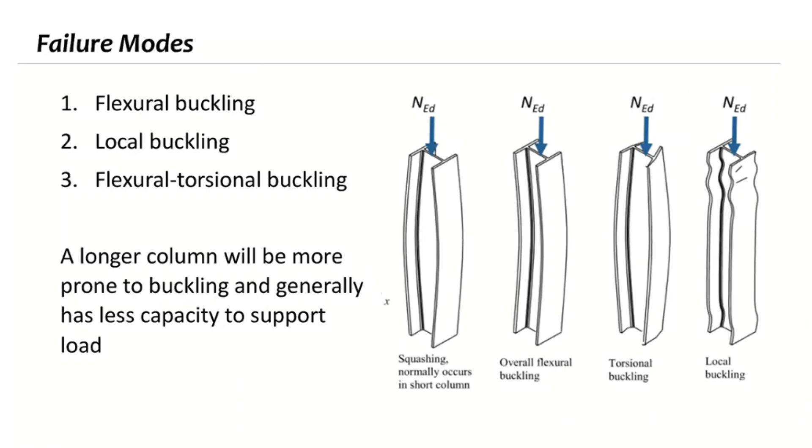Last meeting we discussed all about the principles of compression members. We discussed that there are several failure modes that we are expecting in our compression member, and the most common failure in our compression member is actually flexural buckling. So, in order to determine the flexural buckling, we have to determine our slenderness ratio.

Slenderness ratio is actually a measure of the tendency to buckle of a certain compression element. The higher the slenderness ratio, the lower will be the capacity. Again, the higher the slenderness ratio, the lower will be the capacity. That is buckling.

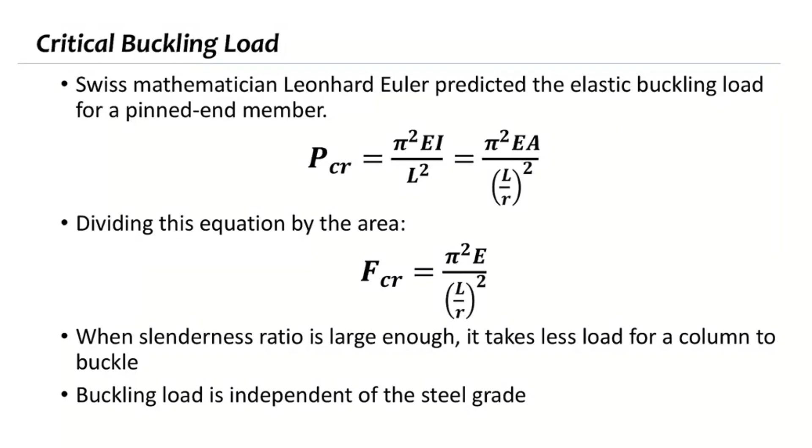We discussed the equation of Euler, where he developed an equation regarding critical buckling load on a pin end member. We discussed that there are two types of buckling. We have inelastic and elastic. We have inelastic and elastic buckling. And we already discussed the difference between them.

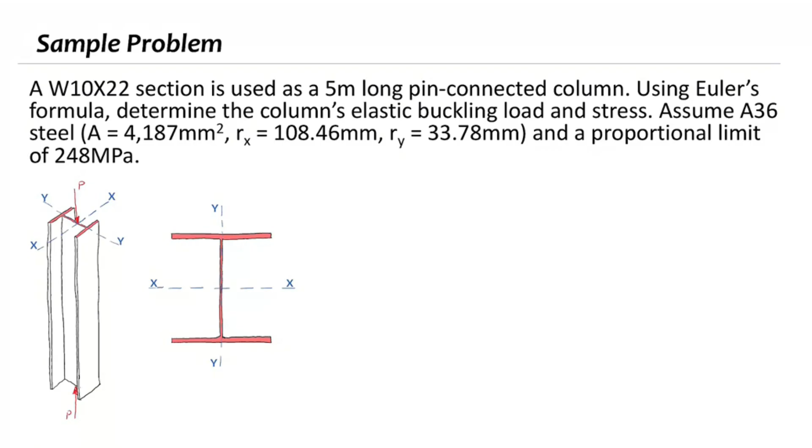We said that for elastic buckling, what happens is that the column buckles even before it yields. The column buckles before it yields, and for the other one, the column yields before it buckles. That's inelastic. When it yields before it buckles, that's inelastic buckling.

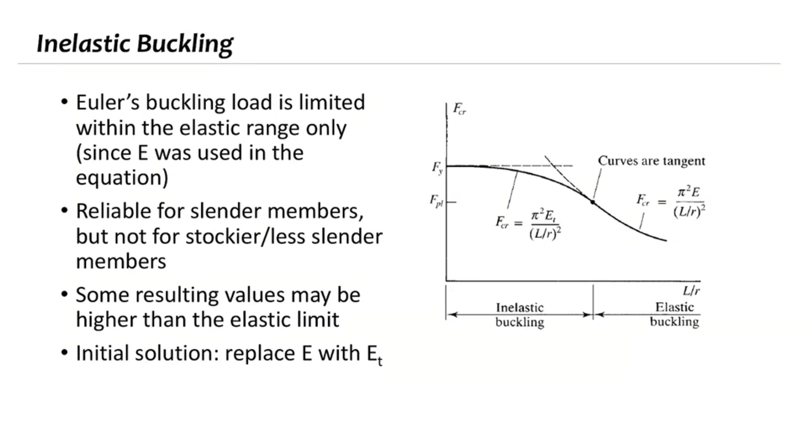Moving on, knowing that there are two classifications of buckling, we have inelastic and elastic buckling. The code actually considers these two types of buckling. In order for us to determine which one is elastic and which is inelastic, we have a boundary. This is the boundary slenderness ratio, or the limiting slenderness, which is 4.71 square root of E over Fy. So, if the slenderness ratio is greater than 4.71 square root of E over Fy, that will be elastic buckling, and our formula for the flexural buckling stress will be 0.877.

On the other hand, if the slenderness ratio is less than 4.71 square root of E over Fy, then the FCR will be 0.658 Fy over Fe, which is basically inelastic buckling. So this is inelastic buckling, and the other one will be what we call elastic buckling.

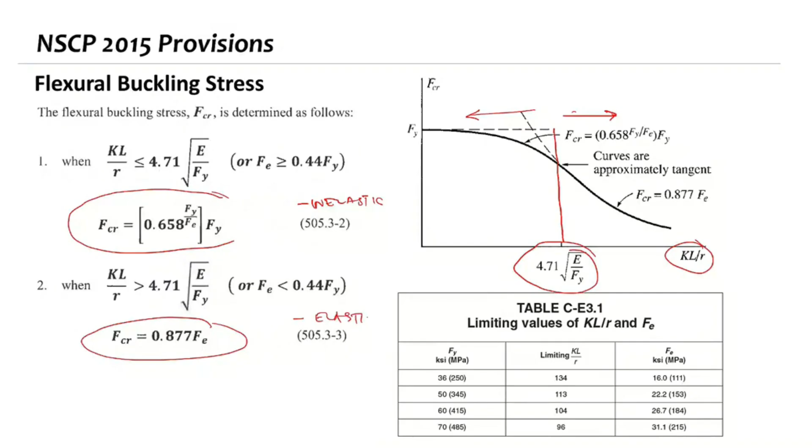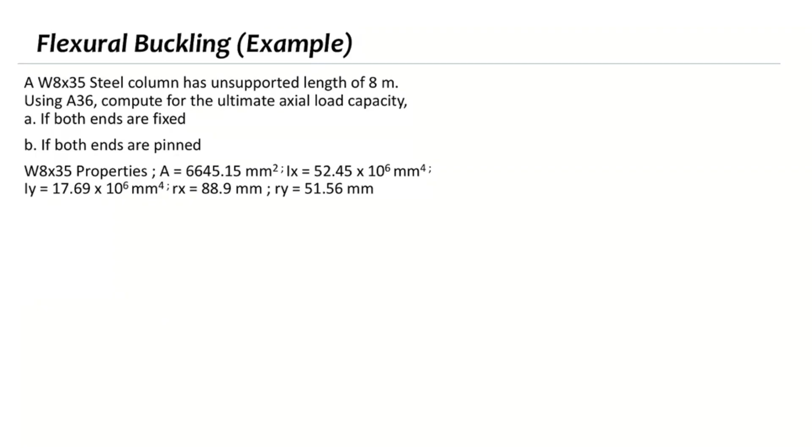We also answered two problems, I think, or three problems, because for this one we answered it twice. If both ends are fixed, both ends are pin, and then we answered another problem where we had to calculate for the radius of gyration, as well as calculate for the DC ratio and the critical slenderness.

Okay, so moving ahead, continuing with our sample problems. Let's try to answer this problem given the concept that we had on flexural buckling.

For this problem, we have to determine the maximum length of W14 by 82 if it's used as a hinge column to support a service dead load of 450 and a service live load of 900 kilonewton, given that Fy is actually 450 megapascal.

According to the problem, we have to use ASD. So given the properties of the W14 by 82, what will be the maximum length of our section? Given that we already have a load, we can use that load to calculate the applied load in our column. So we have the dead load plus the live load. Our load will be equal to 450 plus 900. This is equal to 1,350 kilonewton. And then we can now determine the slenderness ratio.

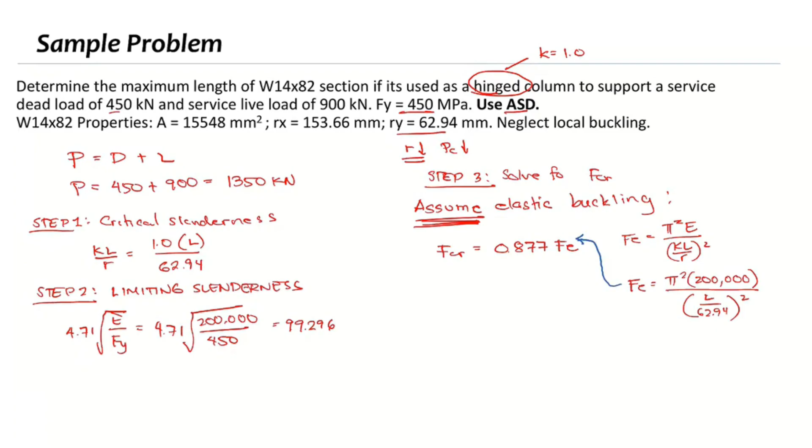Now, since FE is a function of length, we have to input FE to FCR. FCR will be equal to 0.877 times FE, multiplied by pi squared times 200,000, divided by L over 62.94 squared. So this is our FCR.

Now, given that we have FCR, we can actually equate. Step number 4, we are going to determine PN. So step number 4, solve for PN. We already know that PN is just equal to FCR times area gross.

And since we are using allowable stress design, ASD, P allowable is equal to Pn over omega, which omega is actually equal to 5/3. So Pn over 5/3.

Now, the P allowable, we are now going to equate this with our value of the axial load, the axial load that the column is actually carrying. So if we are going to equate it with 1,350, then the equation now will be 1,350 is equal to Pn.

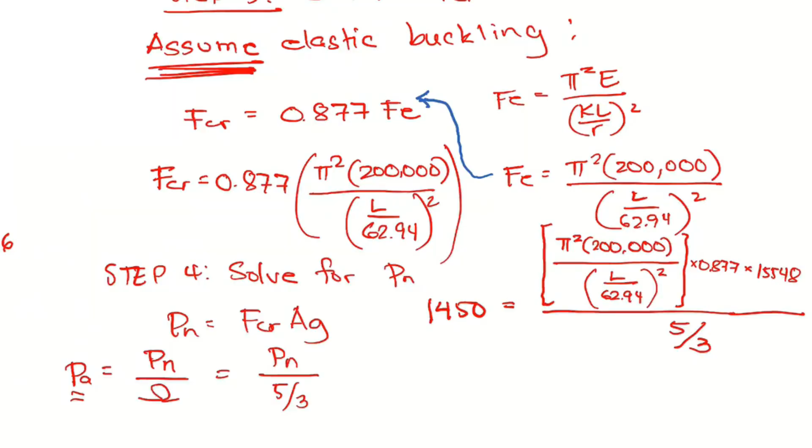Pn is equal to FCR, which we already have, pi squared times 200,000 divided by L over 62.94 squared, times 0.877, times area. The area of our section is 15,548, divided by 5 thirds. And since the answer will be in Newton, I have to convert the 1,350 to Newton, times 10 raised to 3.

Given this equation, I can now solve for the length. What is the length? For this one, pi squared times 200,000 divided by x over 62.94 squared, times 0.877, times 15,548, divided by 5 thirds.

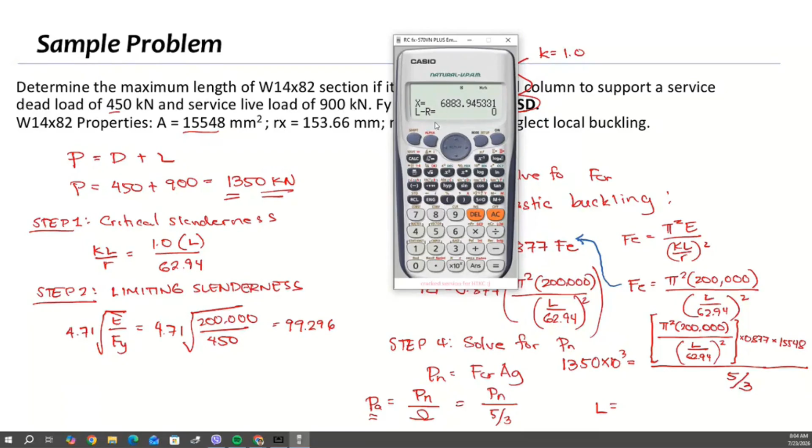Okay, shift solve. We will have a big number, so around 6,883.945. So the answer is actually around 6,883.945 millimeter. So again, that's not yet the final answer because we are still assuming.

We are assuming elastic buckling, so we have to check whether it's correct or not. We have to check if it's elastic buckling.

So to check whether it is actually elastic buckling, then we have to calculate KL over R, which will be 6,883.945 divided by 62.94. What's the slenderness? That is equal to 109.373. 109.373 is greater than 99.296.

So that means this is indeed elastic buckling. So our assumption is actually correct. So the final answer will now be this value, 6,883.945.

Is there any question regarding this problem? As you can see, we just follow the same procedures that we have. Is this clear?

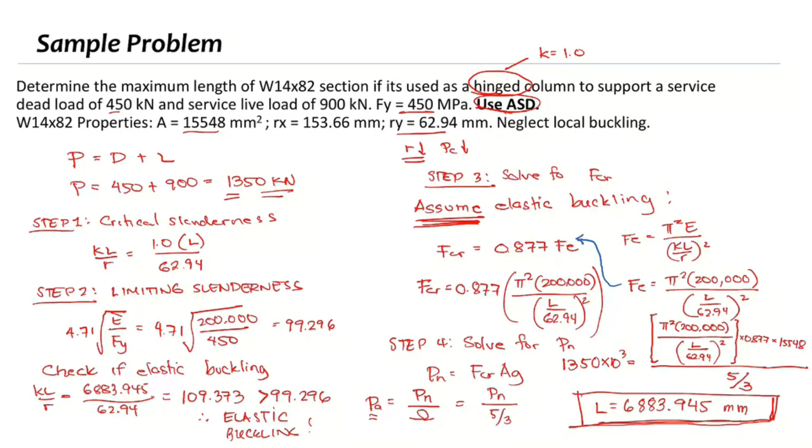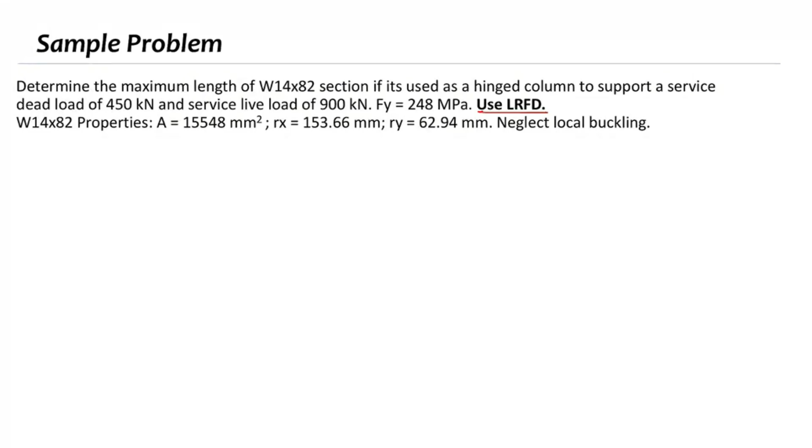So it's actually the same problem, but now let's try to recalculate it. But this time, the Fy will be 248, and at the same time, we are going to use LRFD. So it's almost the same problem. We have to determine the maximum length if it's used as a hinge column to support a service dead load of 450 and a service live load of 900. So for this one, our ultimate load will be factored.

So that is 1.2 dead plus 1.6 live. So our PU will be equal to 1.2 of dead load 450 plus 1.6 of live load 900, which will give us an ultimate load of 1,980 kilonewton. So step number one, we actually calculate for the critical slenderness, that is KL over R.

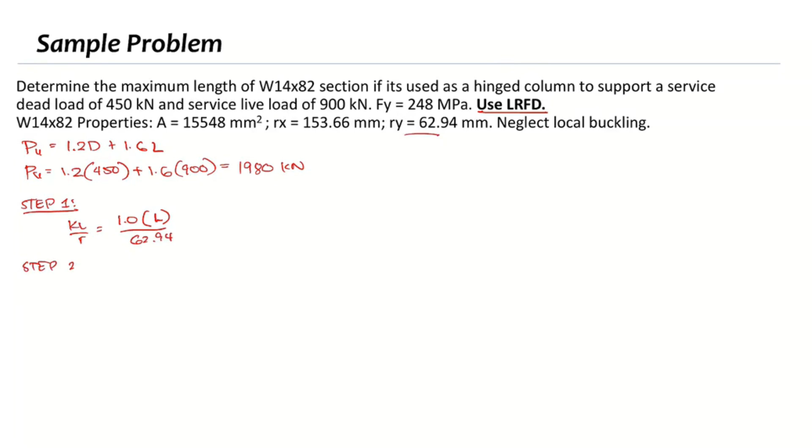Since this is a hinge condition, that's 1.0 times the length. The length is actually unknown, L over R, which is 62.94. And then step number two, we determine the limiting slenderness. And we already have the limiting slenderness, that's 4.71 square root of E over Fy.

But it will change now, the limiting slenderness, since the Fy was changed. So this is 200,000 over 248. Our limiting slenderness is what?

133.755. And then step number three, Step 3, we calculate FCR, solving for FCR. But this time, since we don't know the slenderness ratio yet, I'm going to assume elastic buckling.

Assuming elastic buckling gives an easier calculation. If you think about it, if you use inelastic buckling, what happens is you have a variable in the exponent, because the formula is 0.658 Fy over Fe. So you'll have a variable in the exponent. Still okay, however, it's much easier just to calculate for elastic buckling.

So assuming elastic buckling, FCR will be equal to 0.877 times Fe. Solving for Fe, that is pi squared E, 200,000, divided by KL over R squared, so that is L over 62.94 squared. And then calculating for PU.

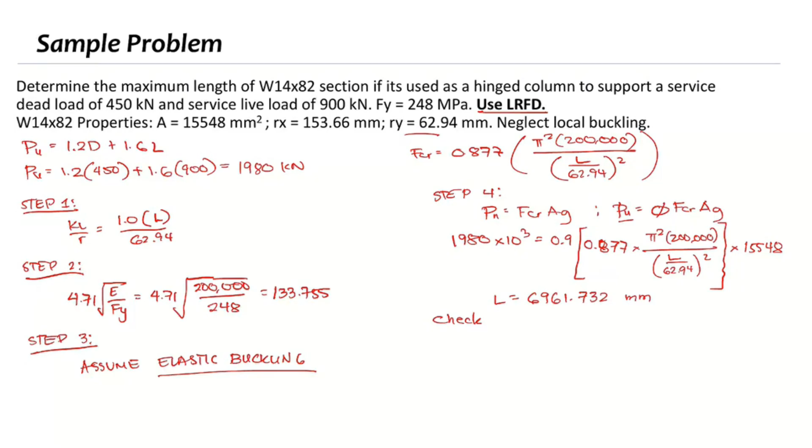Check slenderness. Let's check the slenderness, if the length is actually really elastic buckling. So calculating for KL over R, that will be equal to 6961.732 divided by the radius of gyration, 62.94. This will give us 110.609.

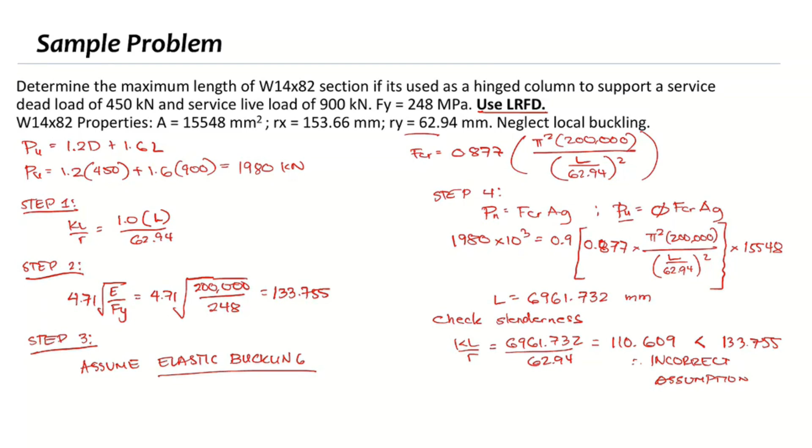110.609 is actually less than 133.755, so this is an incorrect assumption. If that is an incorrect assumption, then we have to recalculate using inelastic buckling. This time, this is not an assumption anymore, it's already given that the column will undergo inelastic buckling. So use inelastic buckling.

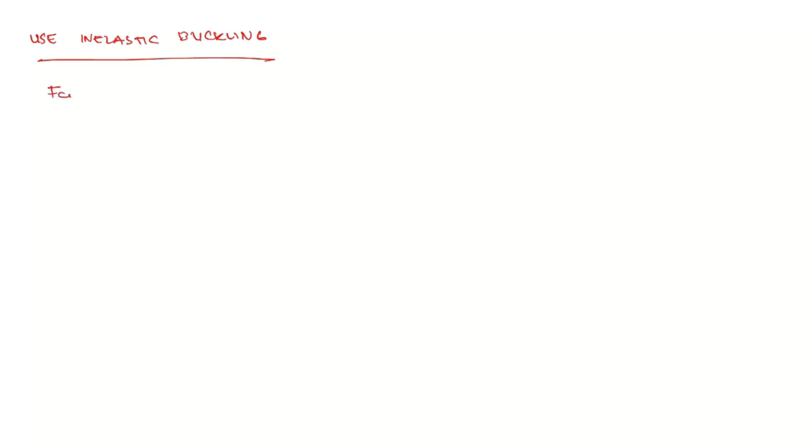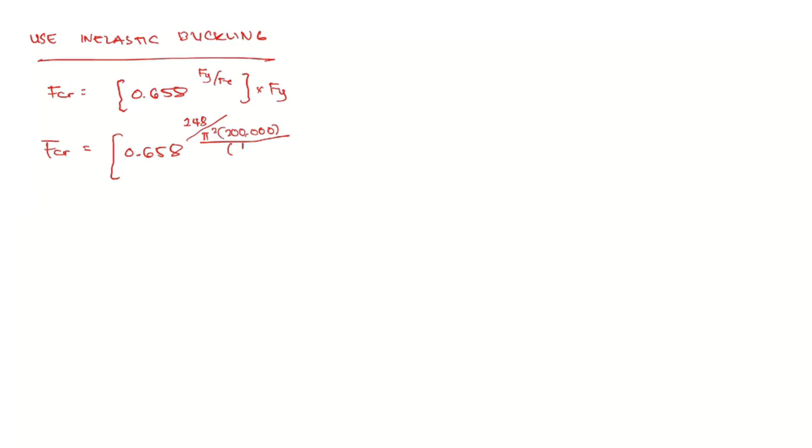So considering inelastic buckling, our FCR is equal to 0.658 raised to Fy over Fe, times Fy. Substituting, our FCR is equal to 0.658, Fy is 248, divided by Fe, that is pi squared E, 200,000 divided by L over R. Our R is 62.94, so that is L over 62.94 squared, quantity, times Fy, that is 248. So that is our FCR.

It's a factor of the length. So if you want, you could simplify it given the following values. Let's just say if we simplify 248 divided by pi squared, that is pi squared times 200,000, divided by 1 over 62.94 squared. So just like this.

So that you could have the value, please store this to A. It will be stored on A. And then if it's stored in A, then just divide. So this value divided by the L squared that we have, that will become our exponent.

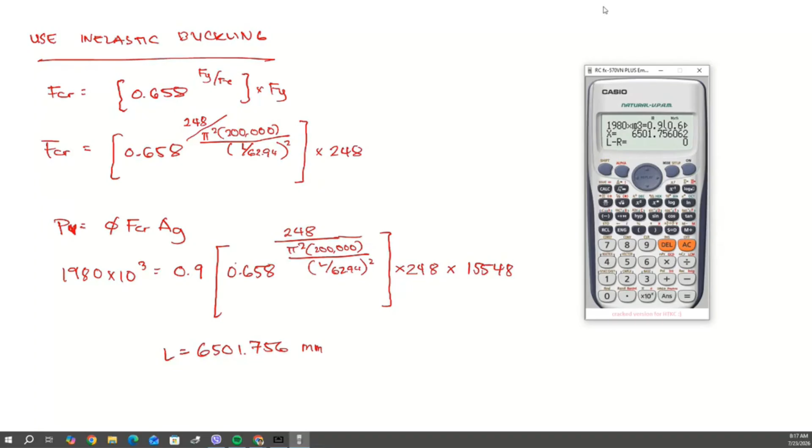Now that we have the length, let's also try to check if indeed the KL over R is actually less than. So let's check KL over R. Our K is 1.0, the length is 6501.756, divided by the radius of gyration, which is 62.94. What is our value?

103.3, this is actually less than 133.755. So this is correct, inelastic buckling. So this is indeed inelastic buckling.

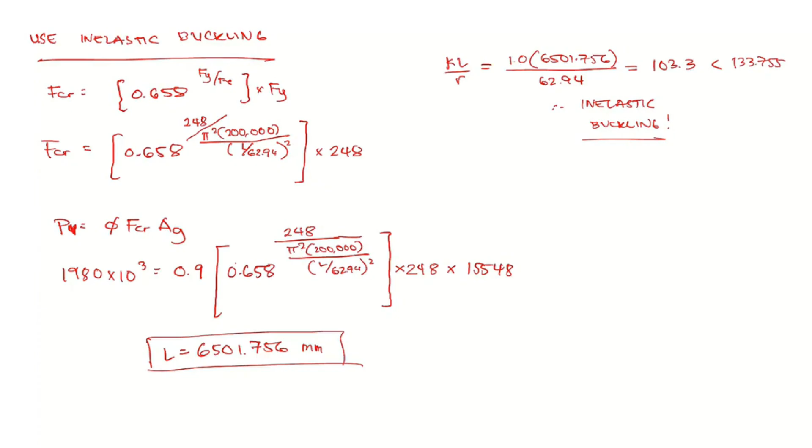Okay, so let's try to answer more problems again. For this one, this is actually a sample quiz, a quiz from last semester. So this is the one that I gave.

A billboard 2 meter high and 4 meter wide is supported on each end by a pin-jointed assembly. The total weight of the billboard is 32 kilonewton. Given that h is 1 meter, this is 1 meter, this is also 1 meter.

The theta is actually 60 degrees. This is 60 degrees. The wind pressure acting on the billboard is 2.0 kilopascal. Wind pressure coefficient is 1.2. So the wind pressure P is equal to 2.0 kilopascal and the wind pressure coefficient C is equal to 1.2. Use A36 steel and neglect local buckling.

Hint: wind load is pressure times the coefficient times the area of contact. To calculate the wind load, please imagine the billboard that we are solving. There's basically a billboard, and if I draw it in 3 dimensions, there's a billboard and two assemblies at the ends. Can you imagine that there's actually two assemblies on both ends? There's a pin-jointed assembly on both ends.

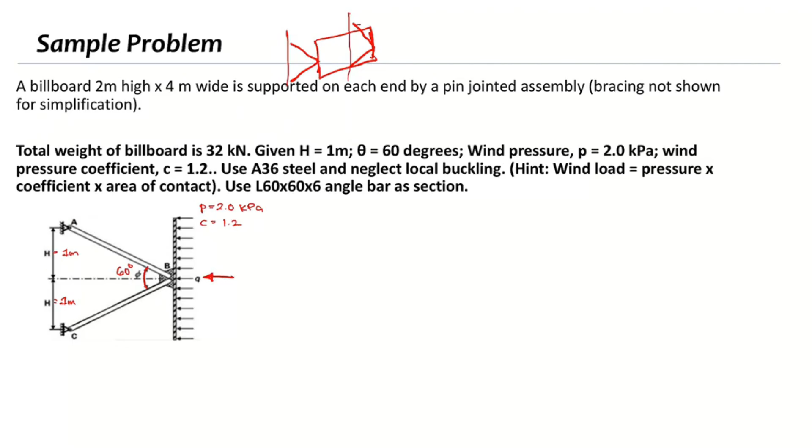So for us to determine the total wind load, which is acting at the center of the billboard, the wind load is equal to the pressure times the coefficient times the area of contact. The coefficient is 1.2, the pressure is 2.0, and the area of contact is the area of the billboard, which is 2 meter by 4 meter wide. So that will be 2 by 4, which gives us the total wind load equal to 19.2 kilonewton. So the total wind acting at the center of the billboard is 19.2 kilonewton.

We also have the weight of the billboard. The weight of the billboard is actually 32 kilonewton.

If we are going to consider only one assembly, let's say only the left side or the right side, then of course the member will not carry all the loads. They will be divided into the two assemblies.

So the 32 kilonewton, I have to divide that by 2. So what one assembly carries is 32 over 2, that will be 16 kilonewton. On the other hand, the wind load: the wind load is equal to 19.2, so divided by 2, that will be equal to 9.6 kilonewton. And then, applying the joint method, I can now calculate the load in our members.

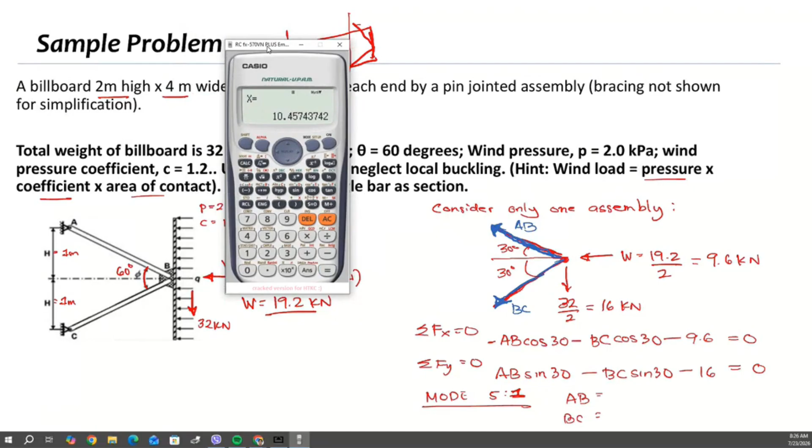So in that case, given the x value that we have, our AB is 10.457 kilonewton. It means positive, so it will be tension.

The BC, on the other hand, is actually 21.543 kilonewton. Since it's negative, it will be compression. So 21.543 negative, that is compression.

Since we are designing the compression member, we are going to determine the DC ratio. I think I forgot to put it here. Determine the DC ratio of member BC.

We have to determine the DC ratio of member BC. So what we are designing is member BC, which is actually in compression. Use ASD, allowable stress design.

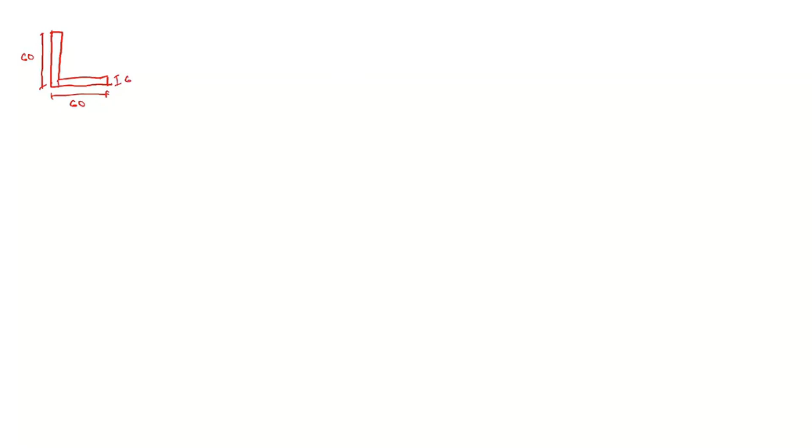So that is 60, this is 60, this is 60, and this is 6. Solving for the area, this is 60 minus 6, so that is 54.

The area will be equal to 60 times 6 plus 54 times 6. What's the area? 684 millimeters squared.

Calculating for the centroid, let's calculate for y bar first.

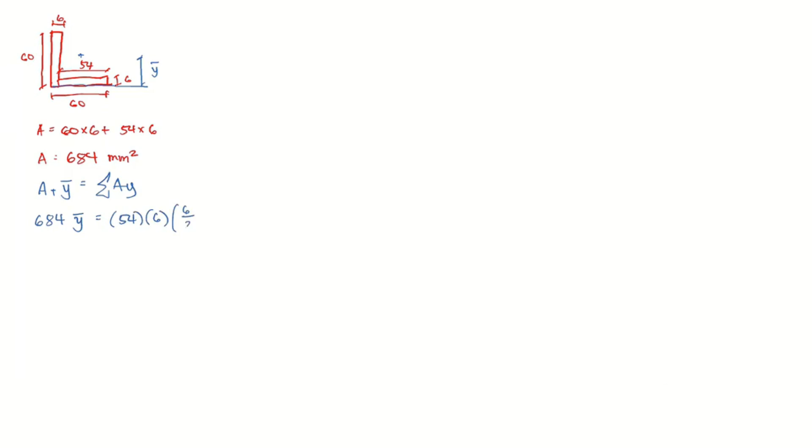Area total times y bar is equal to the summation of area times y. So 684 times y bar equals area 1, 54 times 6, times 6 over 2, plus 60 times 6 times 60 over 2. So what is our y bar?

17.21 millimeters. Given that the section is equal angle, this y bar is also equal to x bar. Since it's equal angle, our x bar and y bar are actually equal, because no matter the orientation, the position of the centroid remains the same.

So if you want to verify, let's check if they're really equal. Let's try to calculate the centroid coming from the left support, or from this reference line. To check, calculating the centroid, that will be 684 times x bar equals 60 times 6 times 6 over 2 plus 54 times 6 times 6 plus 54 over 2. What is our x bar?

I think it will be the same. Is that right? 17.21. It's basically the same. So because they are equal angle, y bar is equal to x bar.

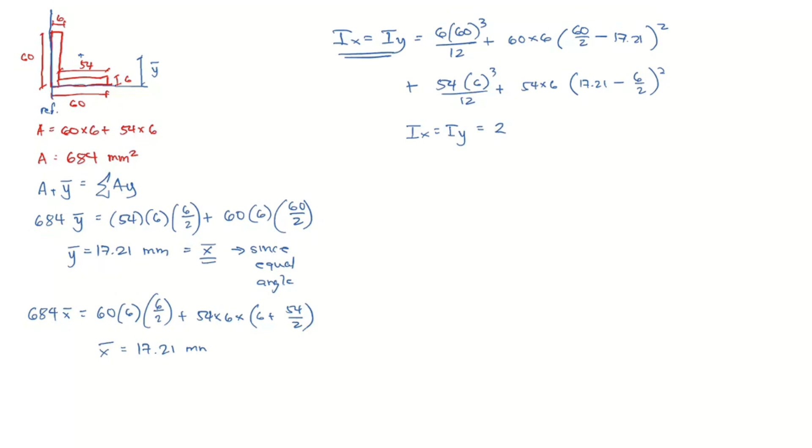The answer is 233.286 times 10 raised to 3. Is this correct? Can anyone else confirm the value of Ix?

Raised to 3, okay, raised to 3. So, times 10 raised to 3. 233.286 times 10 raised to 3. Is this okay?

Can anyone else confirm? Okay, so if this is okay, do you agree that I can now calculate for Rx, or the radius of gyration that I will be using, to calculate for the radius of gyration?

Let me put some context into that question. We already agree that when we are solving for KL over R, the radius of gyration that we should be using is actually the R minimum. It's already established that when we are solving for KL over R, the radius of gyration we should use is R minimum.

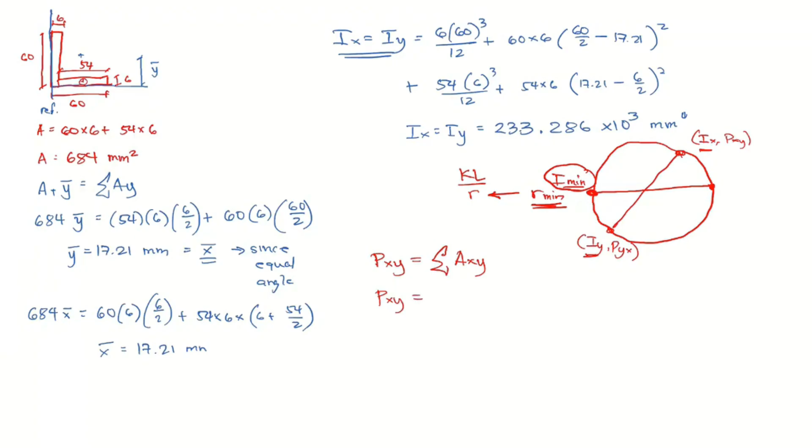So solving for the product moment of inertia, Pxy, that is equal to the summation of area times x times y. If you can still remember, Pxy will now be equal to area 1, let's consider the bottom part or the left part, that's area 1, and the bottom part is area 2. So the left part, 60 times 6, area is 60 times 6, and then the x value will be equal to 17.21 minus 6 over 2.

Is it positive or negative? It will be negative since it's actually on the left side. So that's x, and then calculating for y, the y value will be equal to 60 over 2 minus 17.21. That will be positive since it's actually above the centroid. Positive. So plus area 2.

That's 54 by 6. Calculating for the distance from the y-axis, that is 6 plus 54 over 2 minus 17.21. Positive or negative for this one? Positive, that will be positive.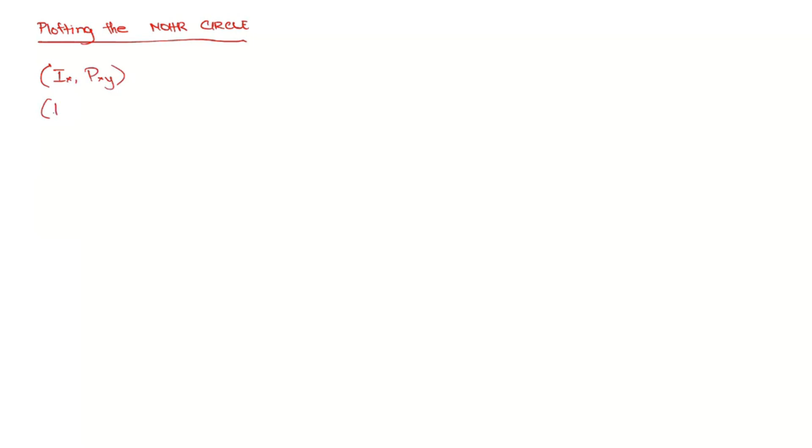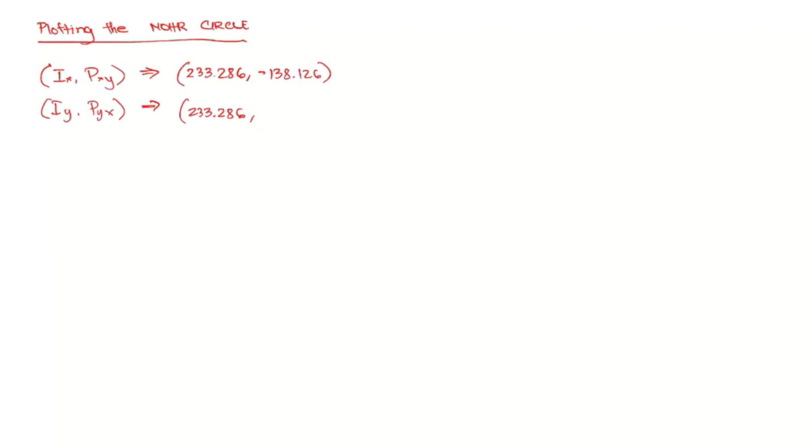Okay, so if we're going to plot the Mohr circle, since Ix and Iy are actually similar, we will have this circle. This is our circle, so that means coming from top to bottom, this one is actually along the diameter. So this is 233.286, 138.126, this is the y-axis, and this is now the x-axis, which is 233.286, negative 138.126. Do you agree that this is the Mohr circle that we are going to plot?

Yes, so now we can easily calculate for the radius of gyration. Take note, our target is calculating for the I minimum, so we can easily calculate for the radius. The radius is actually, based on this Mohr circle, just the PXY, 138.126. So that is just the radius. So to calculate for the I minimum,

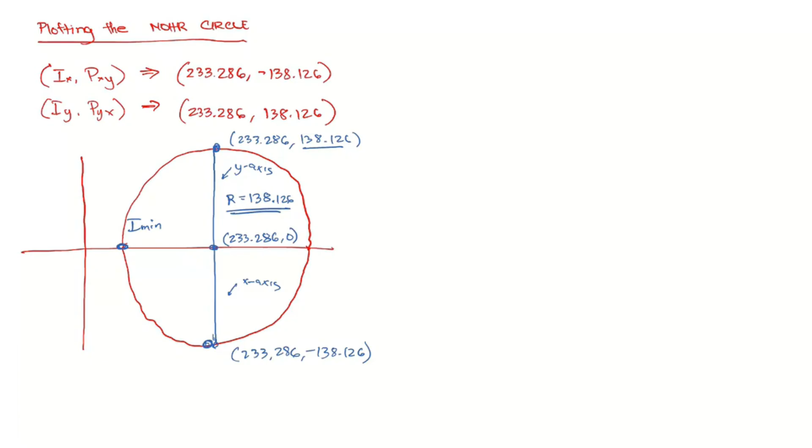given that the center is 233.286, 0, that means our I minimum will be equal to 233.286 minus the radius 138.126. What is our I minimum?

95.16 times 10 raised to 3 millimeter to the fourth. So that means the weaker axis, or the weak axis where the buckling will occur for an angle bar, is not on the x-axis, it's not on the y-axis, but it's actually on an angle, at a certain angle of the member. So let me ask, what is the angle from the x-axis

where the section will buckle, where the section buckles. What is the angle from the x-axis or y-axis where the section buckles? The answer is, that's correct, that's 45 degrees. Why is it 45 degrees?

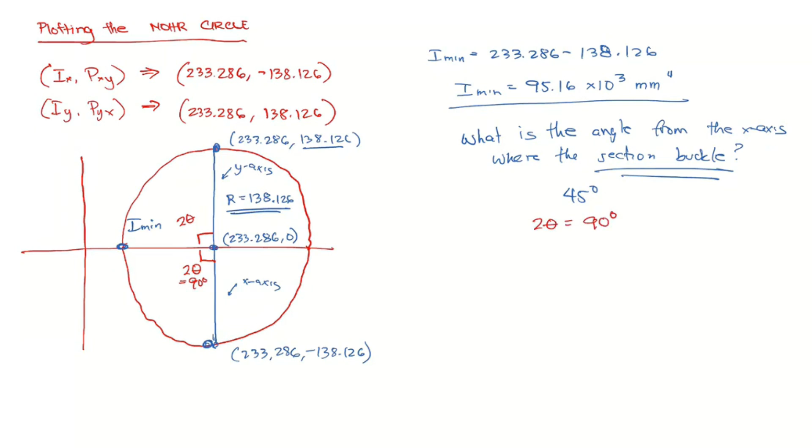Because as we all know, in the Mohr circle, the angle is actually twice, so this is 2 theta. The angle between the y-axis or the x-axis is twice theta, which in this case is 90 degrees. So to solve for theta, 2 theta is equal to 90, so theta is equal to 45 degrees. So the axis which is critical to buckling is 45 degrees from the x-axis or y-axis. That is the angle from the x-axis where the section will buckle.

45 degrees. So if this is our I minimum, we can now calculate for R minimum. R minimum is equal to square root of I min over area. So square root of I min, 95.16 times 10 raised to 3, divided by the area. The area is 684. What is our R minimum? 11.795 millimeter. Given the R minimum, that is now the minimum radius of gyration that we are going to use

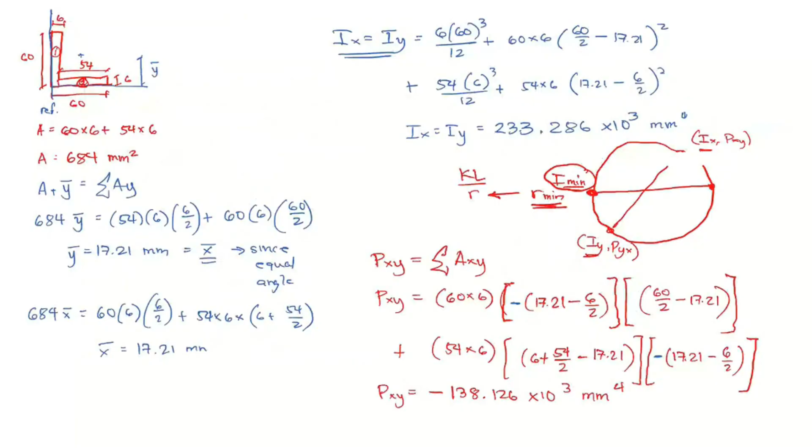for the provisions of buckling, for the buckling provisions. So given the R minimum, we now go to the steps for the flexural buckling calculation. Step number 1, R minimum will be equal to R min, so KL over R. Take note that for a truss element, it's always pin connected. Again, for a truss member, for a truss, it is always pin connected. So if always pin connected, then our K is actually equal to 1.0.

Calculating for the length will be equal to calculating for the length of BC. Since this is 30 degrees, I'm going to use sine. Sine 30 degrees is equal to 1 meter over L. So L is equal to 1 over sine 30. What is our length? 2 meters. So our length is actually 2 meters.

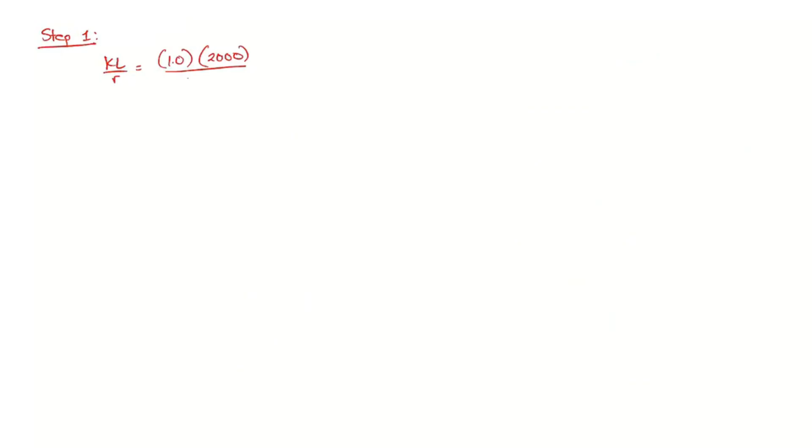So calculating for the KL over R, given the length is 2 meters, so 2,000 divided by the radius of gyration, 11.795. What is our KL over R? 169.5634.

Step number 2, this will be the limiting slenderness. Limiting slenderness is 4.71 square root of E over Fy. So that is 4.71 square root of 200,000 over 248, using Fy still. What's our limiting slenderness?

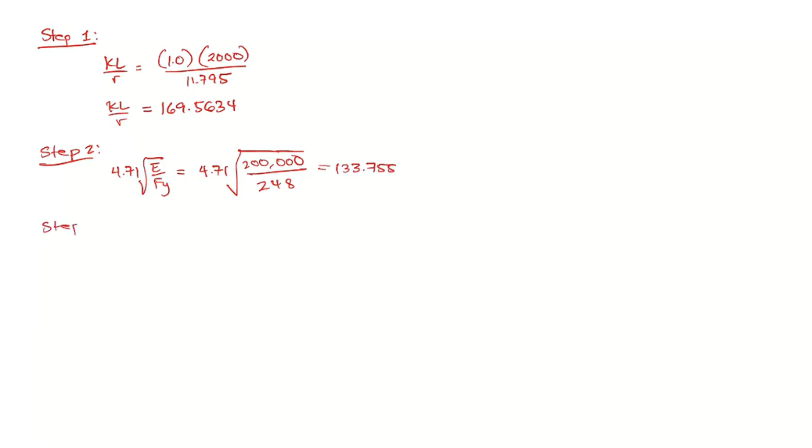133.755. Step number 3, since KL over R is actually greater than the limiting slenderness, this will be elastic buckling. So given elastic buckling, step number 3 is to solve for FCR. FCR is 0.877 FE, and our FE is equal to pi squared E

divided by KL over R, which is 169.5634, squared. What is our FCR? 60.2095 megapascal.

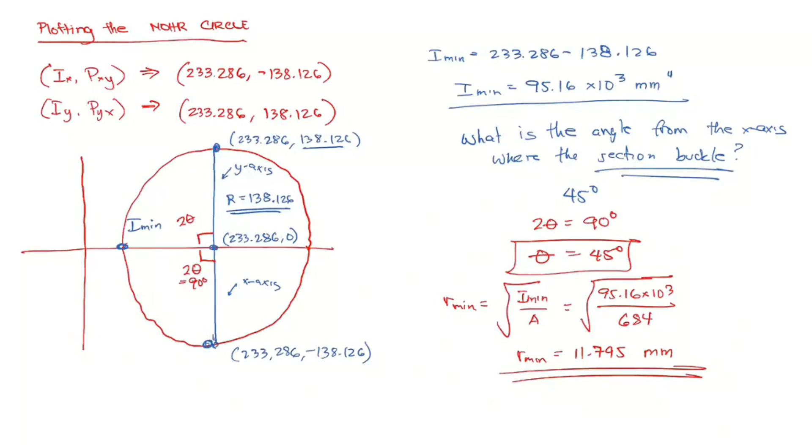Step number 4, to solve for Pn, that is equal to FCR times area. So that is 60.2095 times the area, our area is 684. What's our Pn? Divided by 1,000. So that's 41.183 kilonewton.

So solving for P allowable, that is equal to Pn over omega. So that is 41.183 divided by omega, 5/3. That is equal to 24.71 kilonewton. That is now our capacity.

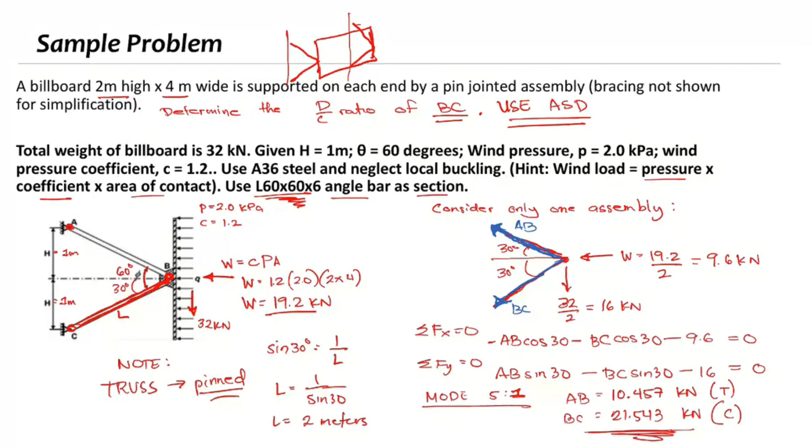So the question is asking about the demand over capacity ratio. The demand is coming from our load, which we already calculated. The load from our BC under compression is 21.543 kilonewton. So the demand is 21.543 kilonewton divided by the capacity, 24.71. Our DC ratio will now be equal to 0.872. This is less than 1.0, so the design is actually safe. So that will be our final answer.

Do you have any question for this?

This one, the calculation is quite long because we have to solve for the properties. We have to use Mohr's circle. We have to solve for PXY, IX, IY. But the idea here is that the minimum radius of gyration is not always on IX and IY.

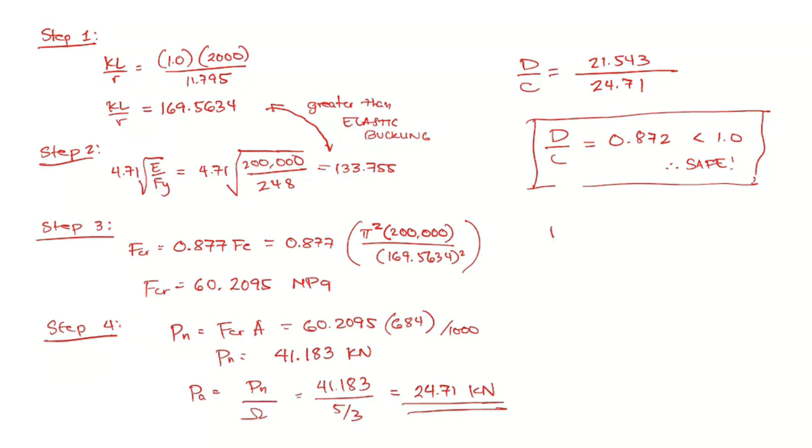If the section is unsymmetrical, then you have to calculate for R minimum. So note, the reminder here is that if the section is unsymmetrical, then calculate for R minimum. The R minimum will be the one used in our design calculation. Again, if the section is unsymmetrical, then calculate for R minimum. That's the concept that we have to understand in this problem.

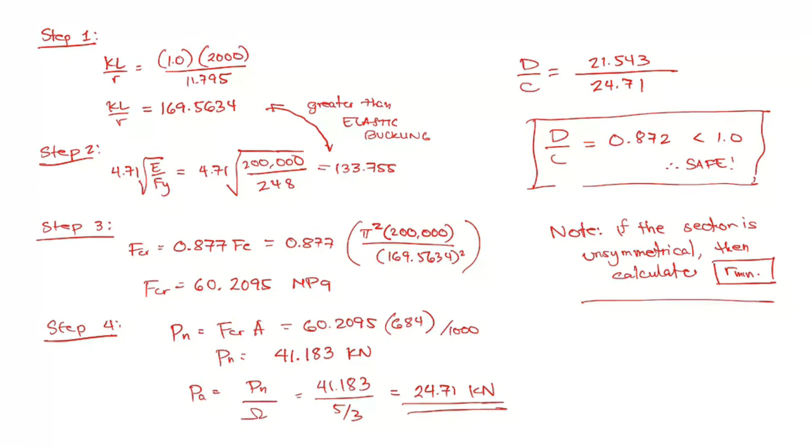Is that clear? Now let's talk about brace column. As we all know, as the length increases, the slenderness actually increases, which makes the capacity lower. So what if there is actually too much length?

If the length is too long and we don't want the capacity to be reduced, in order for us to have a smaller length, we add additional support. So to lower the length and to avoid buckling, what we are doing is we are adding additional support in the form of bracing. Bracing could be a girder, it could be an additional support that you put into your column in order to lessen the buckling length.

So let's say for example, if you have a 26 feet column. And since it can easily buckle along the minor axis, then an additional support in the form of a girder was added into our column. Because of that additional support or bracing, now the effective length that will buckle was actually reduced to only 13 feet. So coming from 26 feet, because of the bracing, it was reduced to 13 feet.

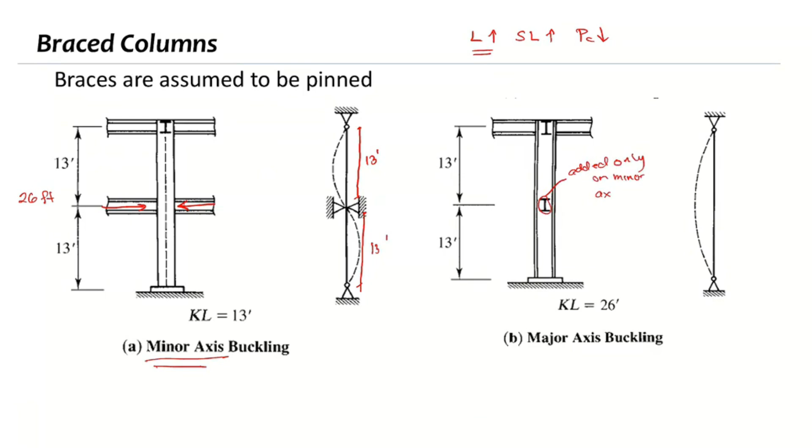However, if we put bracing about the minor axis for minor axis buckling, take note that it does not affect the major axis. The major axis is not affected by the bracing added in the minor axis. So as you can see, since the bracing is added only on the minor axis, the major axis still has a length of 13 plus 13, which is 26 feet. So the major axis buckling is still 26 feet, and that will be our major axis, since the additional support is only added on the minor axis.

So in this case, if you have additional support, there are some notes you have to consider. Number one, you cannot rely on the R minimum alone to check which one is actually critical. You have to check both axes whenever there are brace columns. So number one, check both axis slenderness. Why do we have to check both axis slenderness? Because now the length of the minor axis and the length of the major axis are actually different. That means you have KLX over RX and KLY over RY.

So the length of X and the length of Y are not equal anymore. LX is not equal to LY. So we don't know which one will govern now. We are not going to depend on the radius of gyration anymore. We have to calculate for the slenderness of each direction and then choose whichever is higher. Whichever is higher will govern.

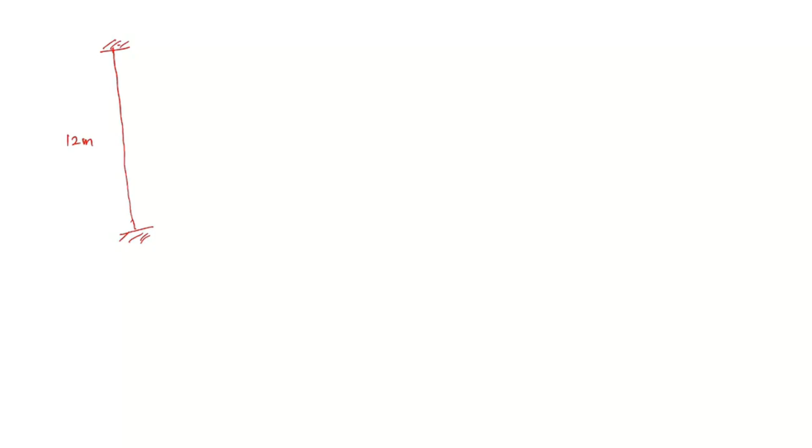So what do I mean by that? Let's have an example regarding bracing. Let's say we have a 12-meter column that's fixed, and I divide the column into 4 meters and 8 meters. This is where I put my additional support, so this will be 4 meters and this is 8 meters.

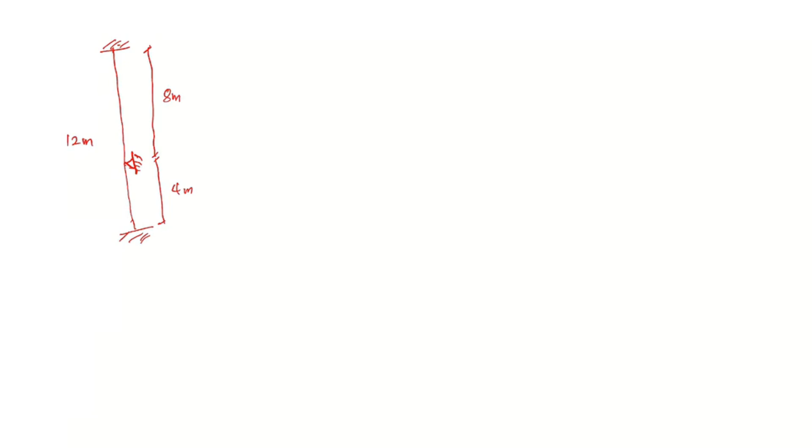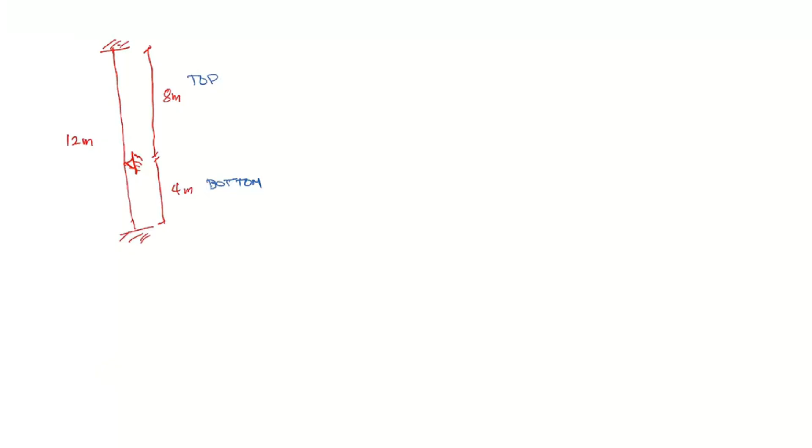So based on the length alone, which is governing? Is it the top or the bottom? The governing length is actually the top, kasi yun yung mas mahaba. So this will govern.

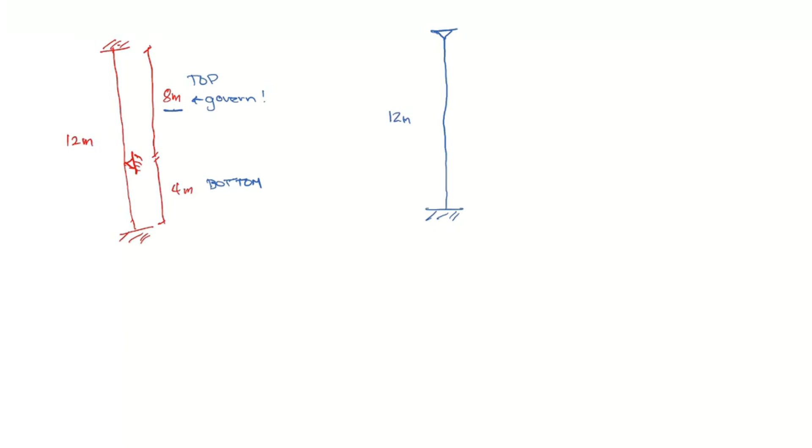On the other hand, let's say we have a pin connected at the top and fixed connected at the bottom. Of course, a longer length of the column will give you higher slenderness. But let's say we have a 12-meter column, and I put the additional support here. This will be 5 meter and this is 7 meter.

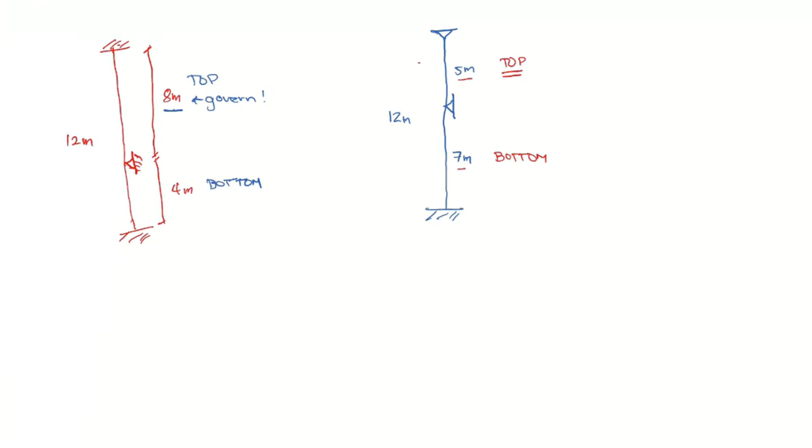Which one will govern? Is it the top or the bottom? Why do you think it's the bottom? Let's check - you cannot rely on the length alone, because if you check, the K is actually different. This is pin-pin, so K is equal to 1. This is pin-fix, so K is equal to 0.7.

So if we calculate the effective length, KL, that is 1 times 5, that is 5 meter. The other one, K times L, that is 0.7 times 7, will give us 4.9. So given the effective length, mas governing pa po yung 5 meters. 5 meter is actually governing compared to the bottom, which is only 4.9, because 5 meter is actually longer.

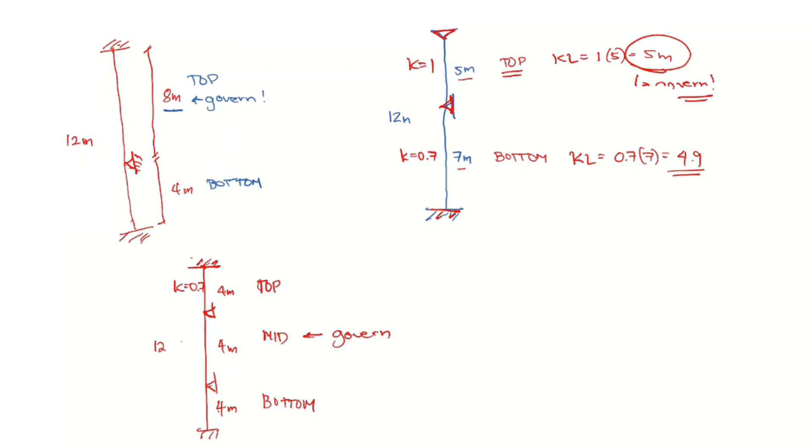Which one will govern? Is it the top, the mid, or the bottom? It's actually the middle. This will be the governing one. Because yung middle natin, the K here is 0.7, the middle is 1.0, and the bottom is 0.7. So the middle one will give us a KL of 1 times 4, that's 4 meters. However, the top one and the bottom one will give us 0.7 times 4, which is actually lower. So the governing one will be the middle.

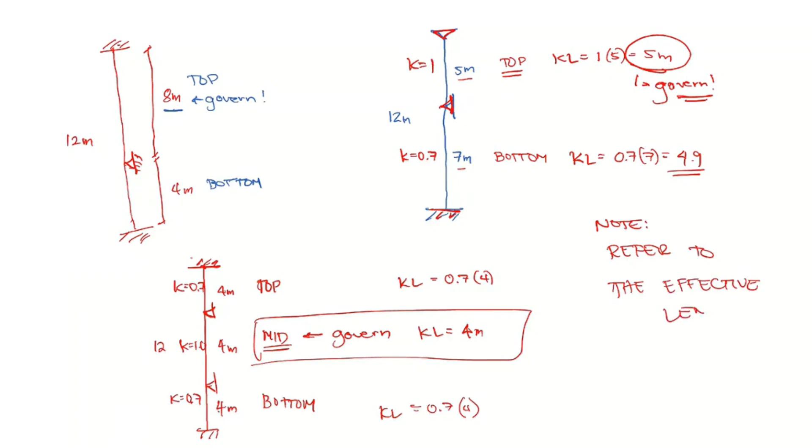So basically, you could refer to the effective length, not just on the length, but on the effective length. So again, the note here is to refer to the effective length. Or if you don't want to refer to the effective length, you could check all the possible slenderness, and whichever is higher, that will be your critical slenderness.

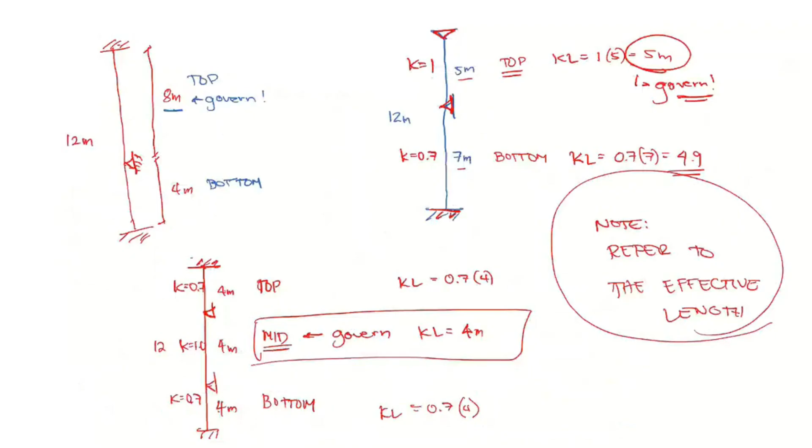So what are the examples of braced columns? Again, these are some examples of braced columns. That means, as you can see, if this is the length of the column, because of the bracing added, the effective length was actually reduced - ito na lang yung effective length niya. So this will be your KL, KL, KL. So even though the length of the column is quite long, because of the additional bracing, the length was actually reduced. But take note, it will only be reduced dun kung saan mo nilagay yung bracing. If it's added on the minor axis, then only the length of the minor axis will be reduced. If it's added on the major axis, then only the length of the major axis will be reduced. It depends where you put the bracing.

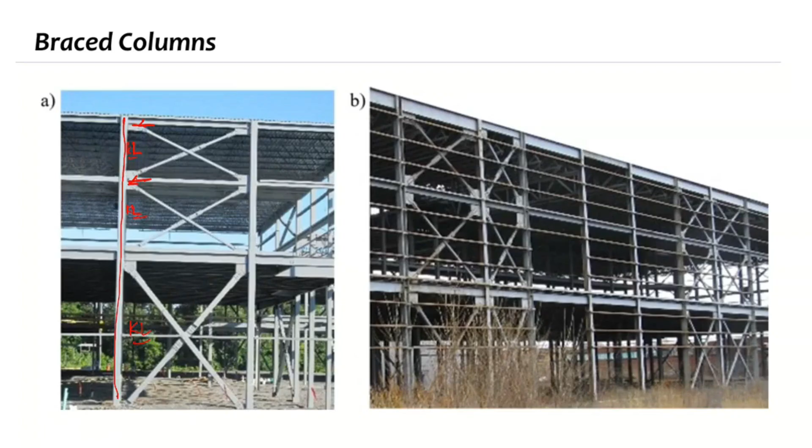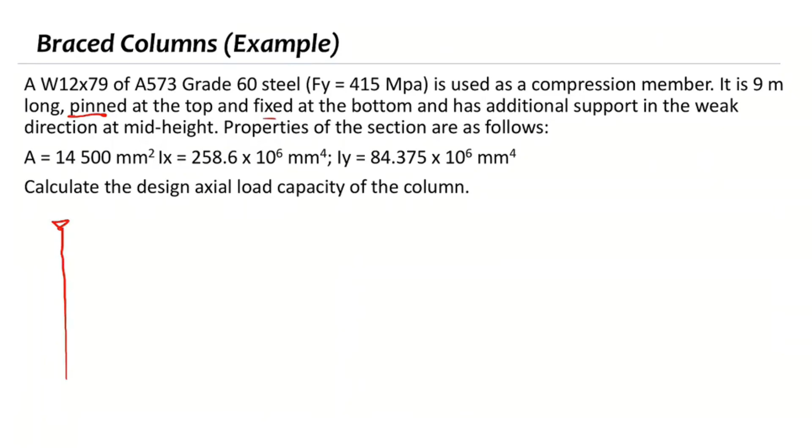Okay, let's try to put that concept into calculation. Let's try to answer this one: A W12 by 79 of A573 grade 60, that's 415 megapascal, is used as a compression member. It is 9 meters long, pin at the top and fix at the bottom. Has an additional support in the weak direction at mid-height. So if that is 9 meters, this is actually 4.5 and 4.5.

Properties of the section are as follows. Calculate the design axial load capacity of the column. Given that this time, there is an additional bracing.

Step number 1, you have to calculate for the critical slenderness. You have to check both axes for the critical slenderness.

About the x-axis, there is no bracing. Take note, no bracing in the x-axis. So for KLX over RX, our K is still the pin connected and fix connected.

So that's 0.7 times the length, which is 9 meters. Since about the x-axis there's no bracing, divided by Rx. Rx we don't have yet, so let's solve for Rx.

That is equal to the square root of 258.6 times 10 raised to 6, divided by area, 14,500. What's our Rx?

Next, given that we already know that it's inelastic buckling, let us now calculate for FCR. Step 3, solve for FCR.

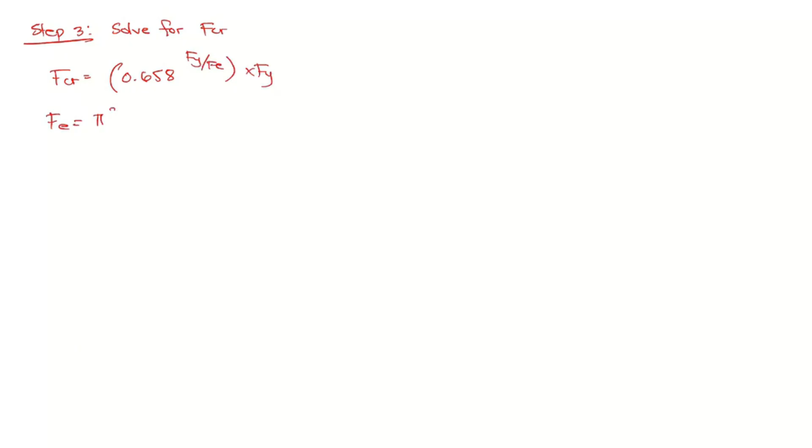Solving for FCR is equal to 0.658 raised to Fy over Fe, times Fy. Solving for Fe, that is equal to pi squared E, 200,000, over KL over R, that is 58.992, squared. Fe is 567.2095.

567.2095 megapascal. Solving for FCR is equal to 0.658 raised to Fy over Fe. Our Fy is 415. So 415 over Fe, 567.2095, multiplied by 415. What is our FCR? 414.987... correction, 305.529 megapascal.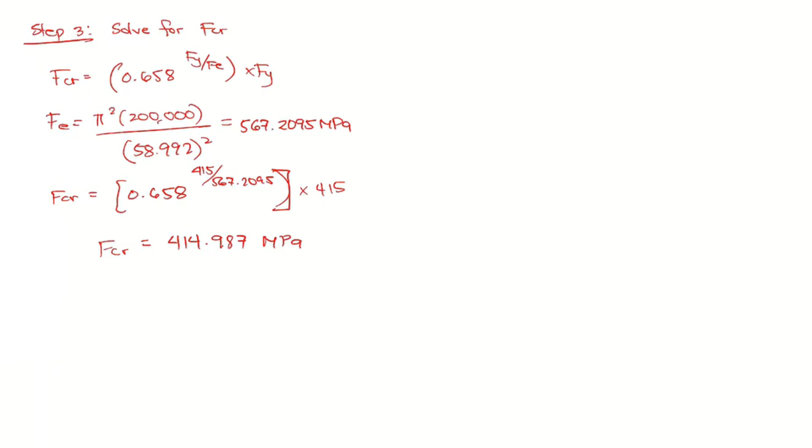305.529 megapascal. Step number 4, solve for Pn. Pn is equal to FCR times area gross. That is 305.529 times area gross, area gross is 14,500. What is our Pn?

So there's some correction. FCR is 305.529. Calculating for Pn, 4430.1705 kilonewton. And the question is asking design axial load capacity.

So using LRFD, phi Pn is equal to 0.9 times 4430.1705. What is our phi Pn? 3987.153 kilonewton. So that's our design capacity. Any question about this problem?

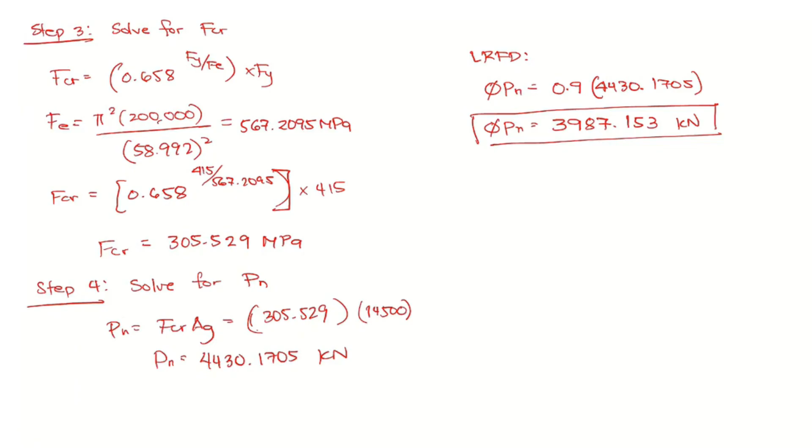When there are braced columns, you just have to check both axes on their slenderness ratio. If you have different lengths, of course, you should consider the highest effective length, and aside from that, you should also consider the support condition.

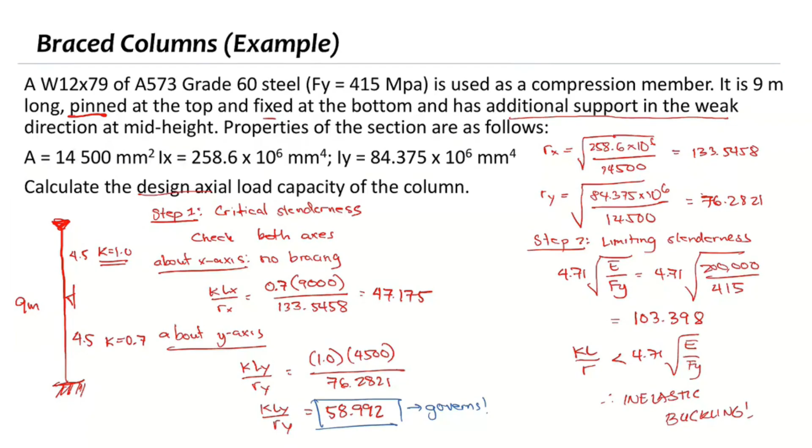So let's write once again for this one. An A36 built-up column, 10 meters long, consists of W350 by 90 with two plates welded on the side to form a box section. With respect to the x-axis, the column is fixed, and on the y-axis, the column is braced at mid-height. The properties of the wide flange are as follows. Calculate the design compressive strength of the column.

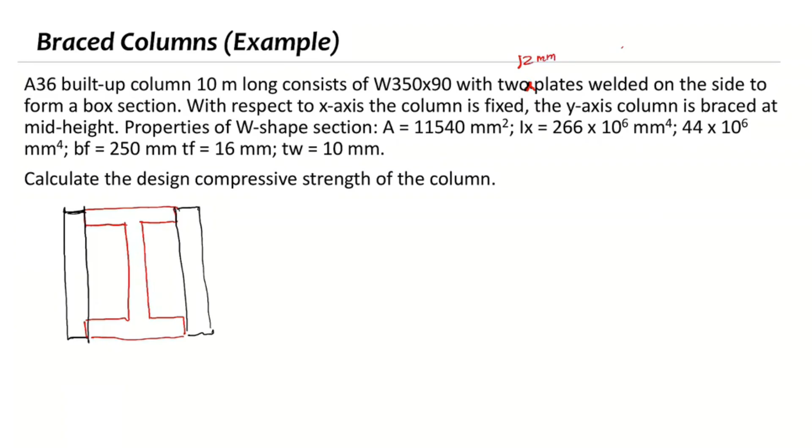So we have an I section with two plates welded on the side to form a box section. The plates are 12 millimeters thick, two 12-millimeter thickness plates. So this is 12 and this is also 12.

Two 12 millimeter plates. Calculate the design compressive strength of the column. In order for us to calculate the design compressive strength, since this is a built-up column, the first thing to do is to calculate for the properties.

So area is equal to the area of the wide flange column, that is 11540, plus twice the area of the plate, that will be 12 times the depth of the wide flange. The depth is actually 350, since W350 means our depth is 350 millimeters. So the depth of the plate is also 350. So 12 times 350. What is our area?

19,940 millimeter squared. Solving for Ix and Iy, Ix will be equal to the Ix of the wide flange, 266 times 10 raised to 6, plus the moment of inertia of the plate. We don't have to transfer since they are now coinciding, so there will be no transfer about x.

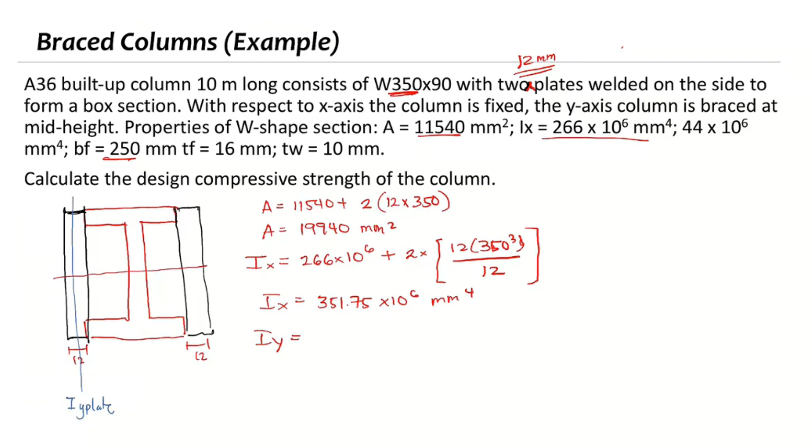Solving for Iy, for this one we have to transfer since the moment of inertia of the plate is here, Iy plate. So I have to transfer into the center, and this will be our d, that is our d squared.

So solving for Iy, that will be the Iy of the wide flange, 44 times 10 raised to 6, plus the transfer Iy of the plate. So 2 times, the base is 350, the height is 12, the height is 12 cube over 12 plus area, that is 350.

350 times 12 times the transfer, the distance from the center of the plate to the centroid of the I section. That is BF over 2, so that is 250 over 2, plus 12 over 2 squared. That is our Iy. What is our Iy? 188.253 times 10 raised to 6.

With this, we can calculate for Rx. Rx is square root of Ix, 351.75 times 10 raised to 6 over the area. The area is 19940. What is our Rx? 132.817 millimeter. Calculating for Ry, Ry is equal to the square root of 188.253 times 10 raised to 6 divided by the area, 19940. What is our Ry? 97.165.

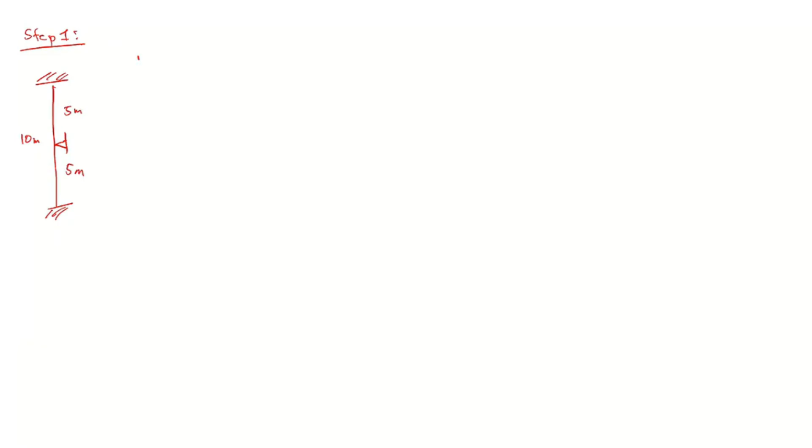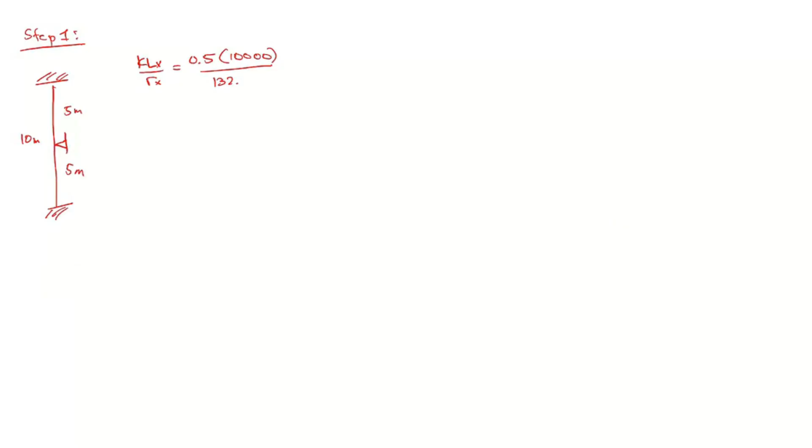So solving for KLx over Rx, for about the x-axis, K is 0.5, the length is 10,000 divided by Rx. Rx is 132.817. What is our slenderness about x? 37.646.

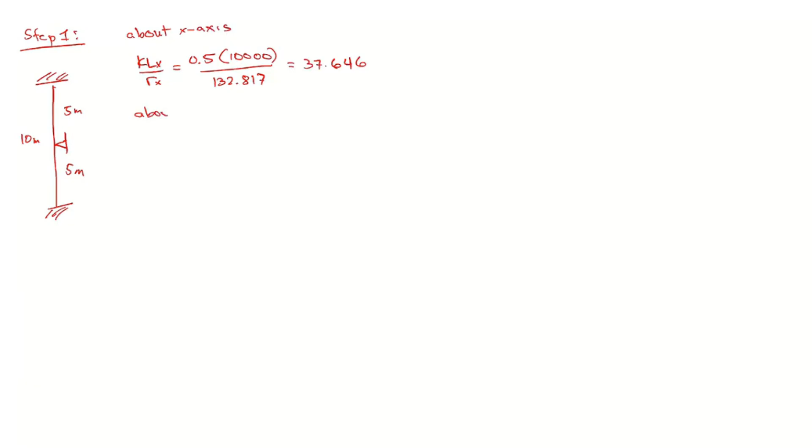About the y-axis, on the other hand, that is KLy over Ry, K is now equal to 0.7. It is pin-fixed. 0.7 of 5,000 divided by Ry, which is 97.165, giving 36.021. So as you can notice here, the governing slenderness is actually not the weaker axis, it's not the y-axis, but it's actually the x-axis.

That is because of the additional support, so the governing slenderness is actually about the x-axis. So given the governing slenderness, step number 2 is the limiting slenderness, that is 4.71 square root of E over Fy, 4.71 square root of 200,000 over 248. What is our limiting slenderness?

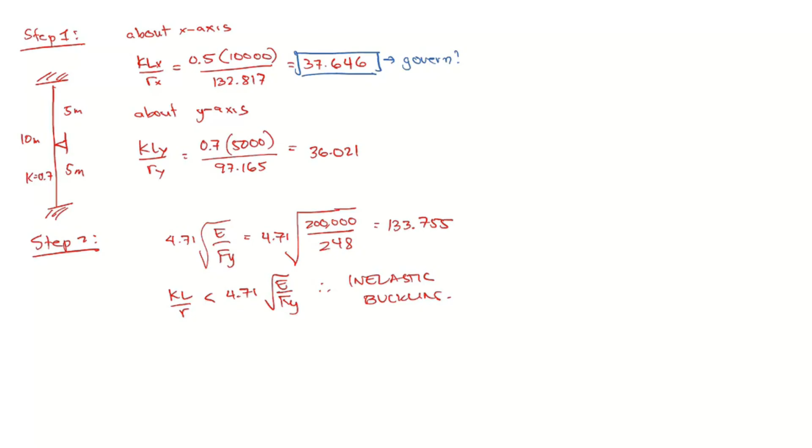133.755. And since KL over R is less than 4.71 square root of E over Fy, this is now inelastic buckling. So given that this is inelastic buckling, we solve for Fcr. Step 3, we solve for Fcr.

Fcr is equal to 0.658 to the power of Fy over Fe, times Fy. Solving for Fe, that is pi squared E, substituting over KL over R, so that is 37.646 squared. What is our Fe? 1392.811.

1392.811 megapascal. Solving for Fcr, Fcr is equal to 0.658. Fy is 248. 248 divided by Fe, that is 1392.811, times Fy 248. What is our Fcr? 230.189 megapascal.

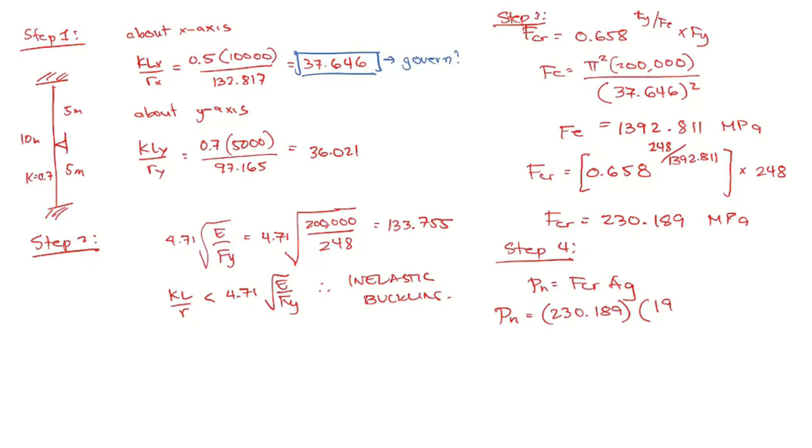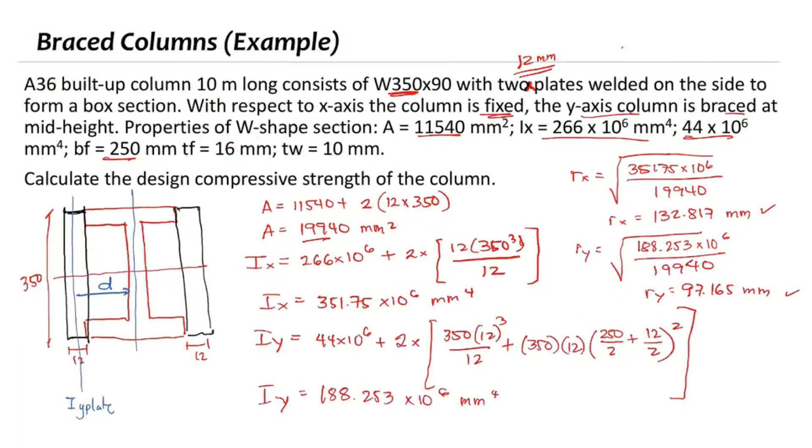Solving for Pn, that is equal to 4589.969 kilonewton. And then step number 5, we solve for the design axial capacity using LRFD. So LRFD, phi Pn is equal to 0.9 of 4589.969. What is our phi Pn? 4130.972 kilonewton.

4130.972 kilonewton. Okay?